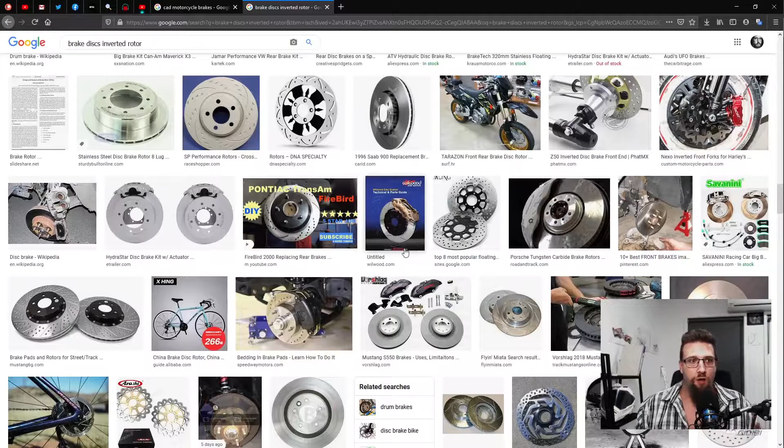Surely I've seen imagery of it before, but I decided to go looking and I can't find hide nor hair of it. It's as if it doesn't exist. They're all internally connected like this - it's all the same. There is zero imagery of inverted rotors attached to the rim or the hub.

And I'm sure I've seen it before. I know it's a thing. I'm not just going crazy, right? Like, surely I'm not. I know I'm crazy, but I'm not going crazy because I am crazy.

So I don't get it. I've been working on the swing arms, and then this happened, and I had to stop what I was doing to try and figure out what's going on. Why can't I find images or references of inverted rotors? I don't get it, they just don't exist.

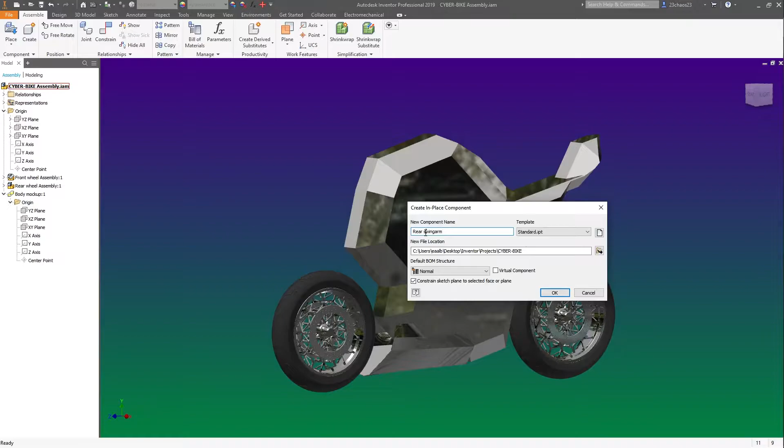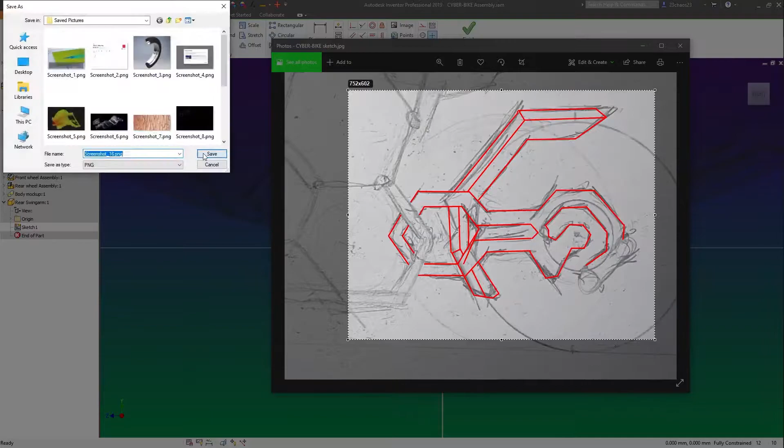Psych! You thought you got rid of me, but I'm back. This is the first time I'm doing voiceovers for my videos. What you can see me doing here is using a screen capture software called Lightshot. It lets me draw on the screen, make pretty pictures, and get an idea of what I'm doing. This is the sketch we drew earlier in episode 1, and I'm just defining the rear swing arm so I can start designing the geometry for it.

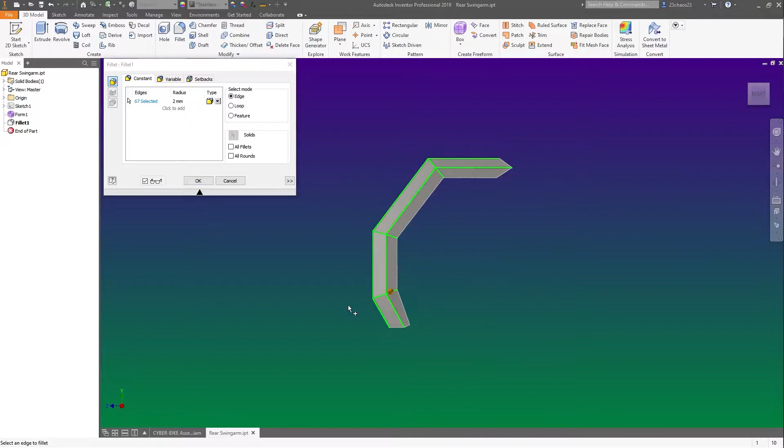Here we are again, just using the Lightshot tool, drawing a rough sketch of where the chain and the sprockets are going to go. This is so I can get an idea of the spacing and how everything's going to go, but as you can see by the question mark, it didn't quite work.

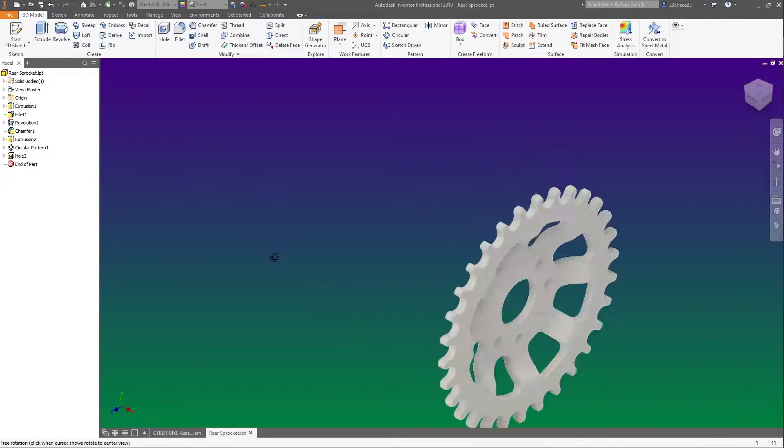You know when you're really set on something being a certain way because you spend a couple of hours trying to prove it isn't, and then you get shown that it is, and only later you ask somebody else and they're like, yeah, that was a thing. Well, that just happened to me.

I went and asked my dad about these inverted rotors, and he goes, yeah, Buell had them. I'm like, that's where I know them from. Yeah, Harley Davidson's Buell had an inverted rotor. Also, Ducati had one. I can't find the specifics on it, but apparently Ducati also had an inverted rotor.

Go figure, these things happen. But yeah, I think we'll leave it there for this video. We'll come straight back in the next video in a couple days with more on that rear swing arm. I'm going to go ahead and do a whole bunch of work because the kind of work I have to do now is real fiddly and a lot of back and forth.